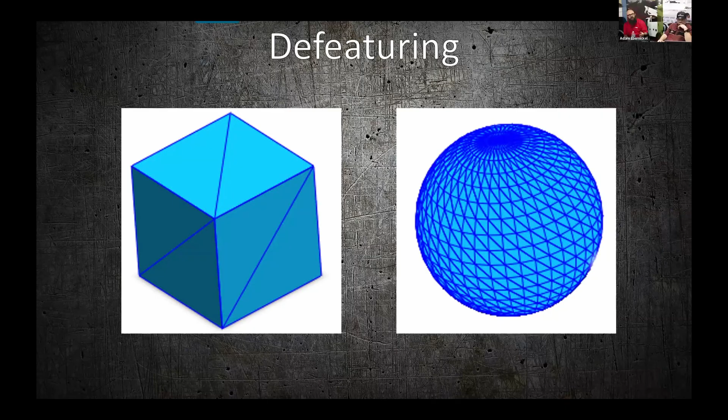So, like tanks, we see a lot of these.

First one, multi-body part. It's got a lot of stuff in it, a lot of information. It's not an assembly, downloaded from our manufacturer, and it's got all these individual parts in it, but it's all just one big blob essentially, with all these faces and whatnot on it: 18 million graphics triangles on one part that the customer is never going to see.

I don't want anybody to do this on their designs. But you see, right behind that centered bar, this baffle in the middle, you can't even see the detail because it's triangles broken up in the file.

18 million graphic triangles just on this one graphics card that we did the study on was 1/10 of the actual capacity of the graphics card, just on this one part.

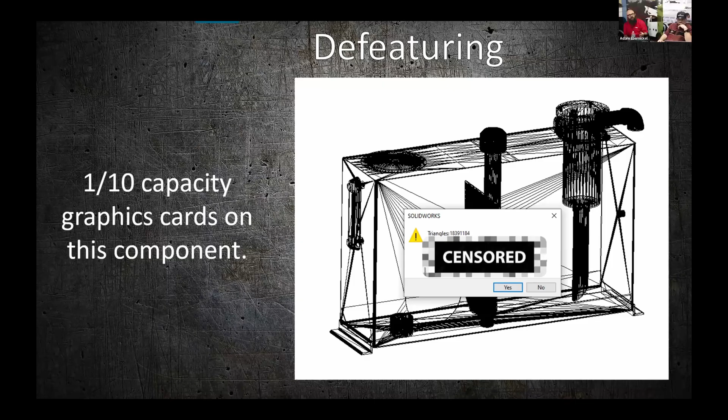So again, you have a finite resource built into your machine. We spec them out fairly well, but we're using 10% of the graphics card just on one part inside of your sales model. It's going to drag you down.

That internal baffle was just holes. The correct thing to model, if you're making that part, yes, that's correct, we did have all those details. But if it's going to be inside of that tank, in a tank install, which is going to be on a sales model, our customer doesn't need to see that internal structure. Neither does SOLIDWORKS. All we're doing is bogging ourselves down with our own modeling practices.

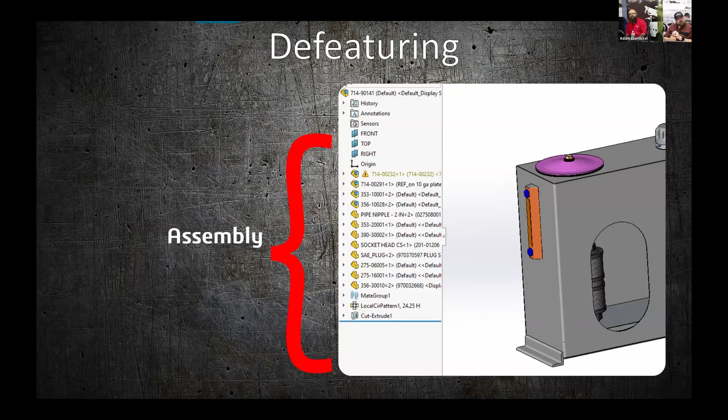So we had a user go through, disregard the error up top, and actually turn this thing into an assembly with individual parts in it that we can suppress and unsuppress and modify a little bit easier, rather than just having a multi-body part.

And we got it down to 136,000 graphics triangles. So from 18 million to 136,000. I didn't do the math there, but that's like a 90 percent or more reduction in graphics triangles.

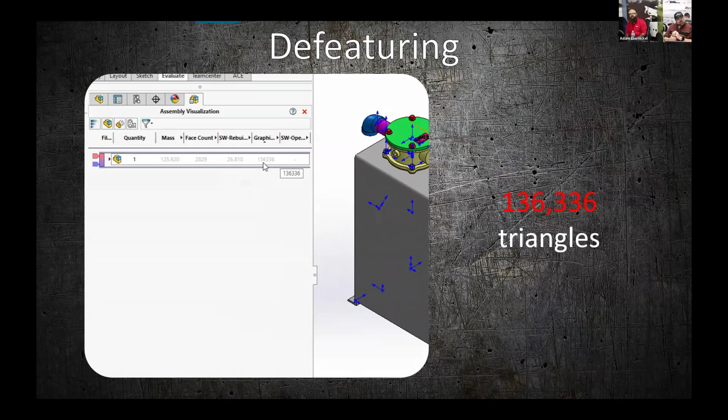Just that baffle went from 12 million graphics triangles to 20. Just the bare minimum, because we're not going to be making this part at all. It doesn't matter to us what the part looks like internally to our sales model or internally to our install kit, because that baffle is welded into a part that we're not going to actually touch and physically make. Somebody else is going to. So we defeatured the crap out of it. We took everything we didn't need out of it and just made it into basically a square. And we went down to 20 graphics triangles.

Massive improvements in calculation time and speed, just on thinking outside the box on, do I really need that? Because as designers, the first thing I want to do is design a really nice looking part because I think I can do that. I want to design all my screws, nuts, bolts. I want to have all the features in it because I'm being paid to model and I'm going to model the thing correctly. Do we need it? No, we don't.

So here's a prime example: truck latch. There's roughly 12 door latches on a truck body. Adam's very familiar with this model, I'm sure. A previous model with the logo and with all the information in there, you see all that data. There's actually text embossed into the handle. There's text embossed into the top of the plate. 209,000 graphics triangles in one latch.

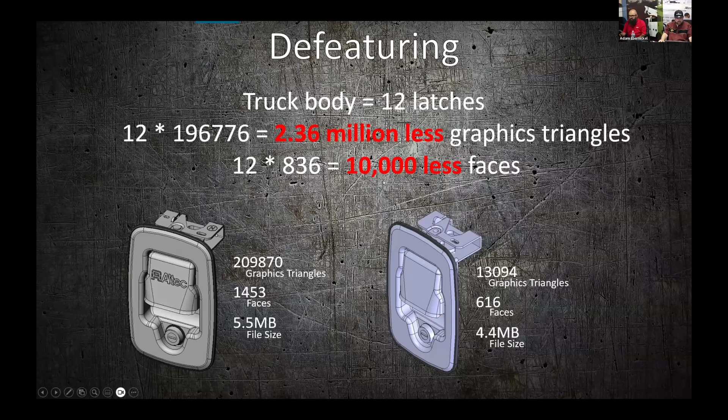Placards. Who models placards in SOLIDWORKS? Okay, do you extrude the text? Don't.

Read the text on that one, on the left one. This placard has 25,556 graphics triangles. If you just leave it as a sketch, which will show up in your print, it goes down to 172 graphics triangles. Yes. We also, inside of Altec, have, if you go in and use your start part for a placard, a simplified sub-configuration in there where you can suppress all that and just have a plain flat one. So when you drop a model in with all that extra text, you're adding orders of magnitude more graphics calculations for your models.

Yes, if you have a sketch in there, you can have it. Yep.

So just be mindful. One of our CAD admins did an event, I don't know, 5 or 6 years ago at World called 'Prove It, You're the Cause of Your Own Problem.' And this is where we kind of got to the point of we were causing our own problems because we were over, I guess, doing our jobs too well and making everything really nice and detailed and pretty. But when it comes down to sales models, these final assemblies, you're working on these big sales models, kicking ourselves in the butt here, trying to

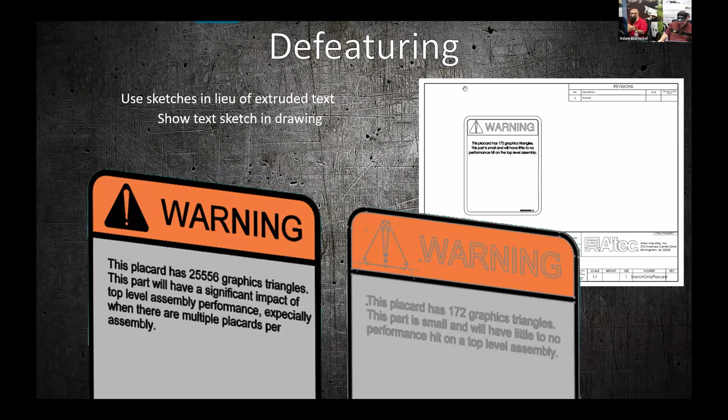Just little things we need to think about as we're modeling through our day-to-day jobs. Deepak says he's using sketch text a lot these days, and it's helping keep the graphics limited. Yes, sketch text does a pretty good job.

So how do we defeature a part? Somebody else mentioned that defeaturing is also critical for creating efficient FEA models. Yes, it is efficient for FEA models as well. Y'all don't do much FEA here, do you? Once in a great while. Good tips, I like that.

So we're going to take this really sweet looking air filter from a company everybody should know, K&N. Because I'm a motorcycle fanatic, we went and actually downloaded a K&N model. We're going to defeature it, and we're going to do it two different ways: the slow and steady way, showing how to do it manually, and then we're going to do it automatically using the features built into the software.

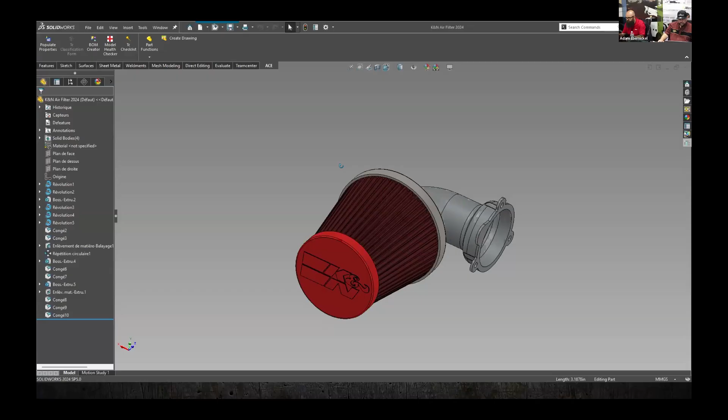So I downloaded this one from a French company. As you can see, all these things have French words in them, just so I don't have to speak French. Oh no, I don't want to see that, go away, trying to get to my options here.

Hate the screen share thing. Alright, tools, options.

It doesn't automatically translate, but you can tell it to. Go to the feature manager system and it shows translated features. You tell it which one you want to go to. This is if you use suppliers that do everything else. Then in the feature tree, it'll translate all the features. That was one thing Adam taught me last year that I was blown away by.

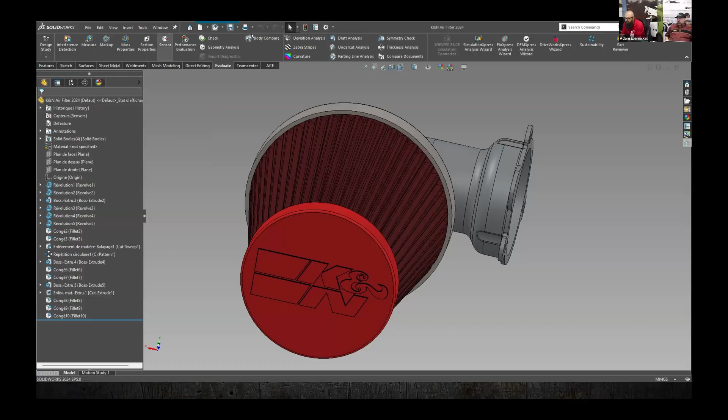How many surface triangles are there? Let's go to evaluate. Hopefully everybody can count past their fingers and toes. What are you talking about? Go away, I love it.

Teams is really bad. So graphics triangle count is 42,074 currently, according to this model. And the circular pattern, pardon my French, takes up 91% of my calculation for this part. Wow, one circular pattern.

Don't ruin my story, sorry. Okay. Move this up out of the way again. I hate Zoom control sometimes, especially since I don't use it much. It's better than Teams though.

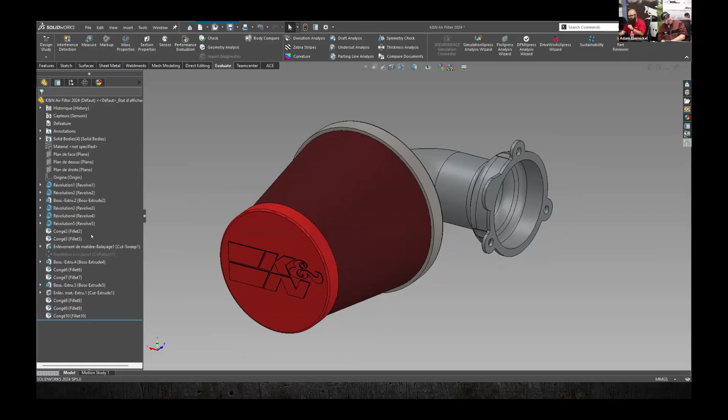So we know that's our problem. We can do something for manually simplifying a part, something as simple as just suppressing it and taking out the cut that caused it.

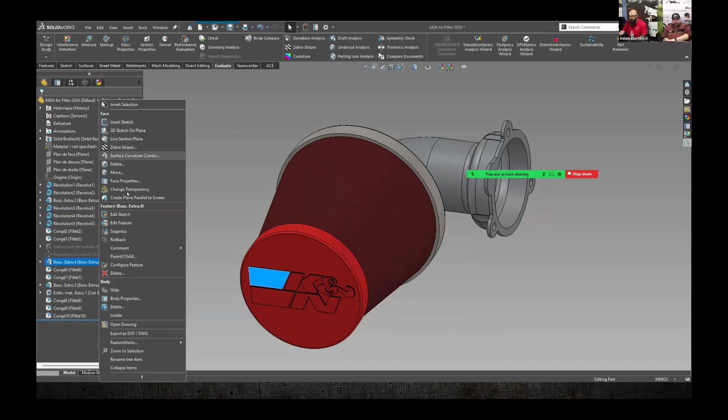Let's run our performance evaluation again. We have 10,000 graphics triangles just on those two features. Now, do I need to see the K&N logo if it's going to be on a full assembly, full chopper assembly? If I'm going to render it, maybe I can turn that off. Do it again, run a performance evaluation. We got it down to 14,000. So we cut down the graphics triangles almost a quarter with three features suppressed.

Is there any other feature, kind of like how in an assembly there's lightweight for parts? Is there anything like that for individual features? You can do that with some patterns. You can tell it to use a geometry pattern versus an actual pattern. An actual pattern takes the physics and cuts the part over and over again. A geometry pattern just moves one blob of information around.

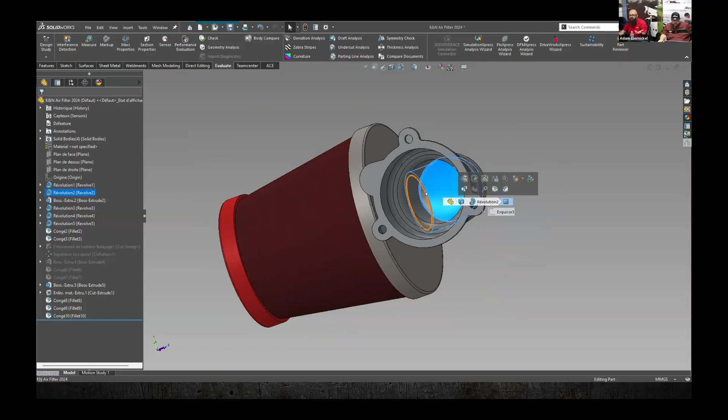But we've got a fairly decent looking model in here. Do I need to see all this information in here? Maybe not, I have to go in and fill this in. We can come in here.

Come in here and do a sketch. This circular sketch here, we'll convert to entities.

We'll convert entities using our shortcut bar. Use the S key or your mouse gestures into your shortcut bar, because I don't like touching the keyboard at all. Let me move my 3D mouse over here.

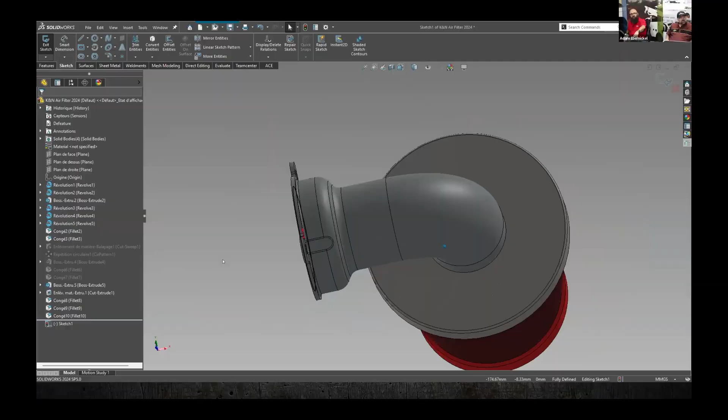It's choppy on mine because we're streaming across two different devices here. Look at his, it's a complete smooth rotation on his. It actually makes SolidWorks function faster, because when you use your mouse wheel to navigate, every click and scroll regenerates the graphics. It won't regenerate the graphics until I take my hand off.

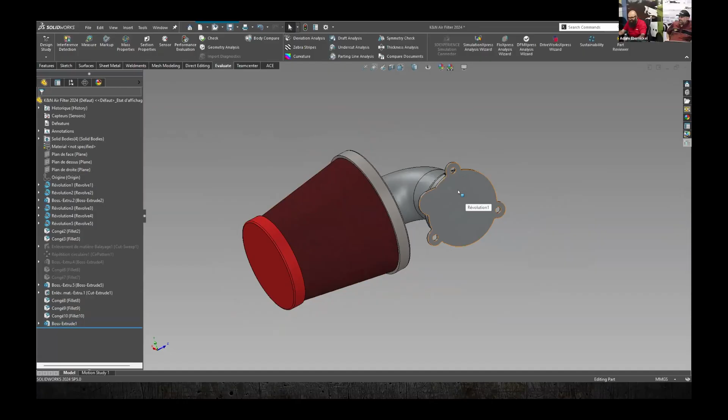But see, I filled the end up here just with an extrude because I don't need to see the internal faces in there. We'll do our performance evaluation again. We're still around 14,000 graphics triangles. Eventually we're going to reach the point of diminishing returns.

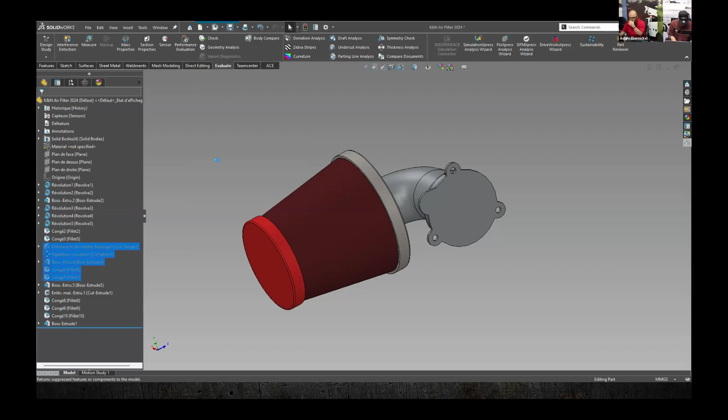So we defeatured this part. You saw how slow that was, but we're going to unsuppress all this stuff here. I wouldn't say it was slow, but it wasn't as efficient as I want it to be, because I'm being told I need to get this thing out. My supervisor yelled at me, my part's not done, I got to get it done fast.

Well, SolidWorks has a nice thing called the defeature command. If you don't have it up in your command manager, go into your search bar, using your S key again to get your search command. Spell out defeature, and we've got the defeature command here.

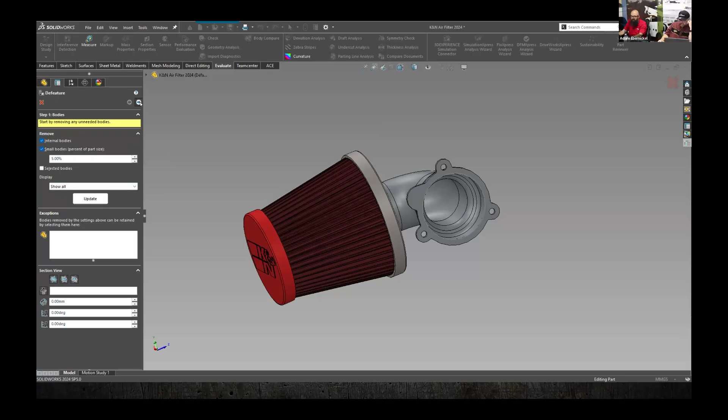So we're going to start. We want to remove all internal bodies, and any small bodies less than, let's say, 5% of the entire part size. I want to then click the next button, the little arrow key at the top here. It's going to split the screen and allow you to say what features I want to keep. Of course it's not going to do it the way I want because of how I'm using this.

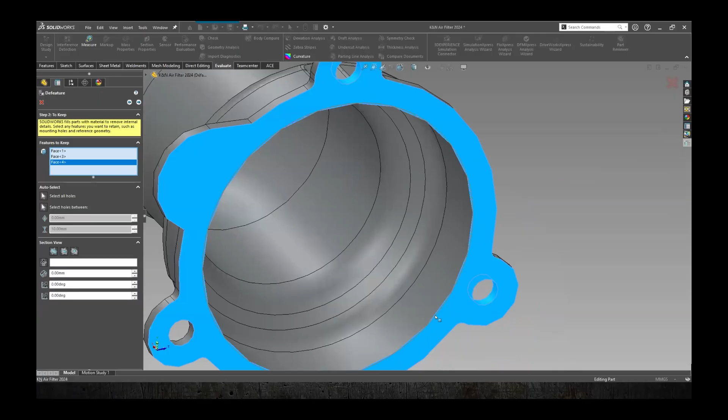Let's do this, go back. Okay, so I know I need to keep the mounting face, and I want to keep the 3 bolt holes that I want to keep.

To remove internal details, it's going to sit and actually defeature over top of everything, start taking away features. So we can come in here and say, okay, now I've got some things I want to remove out of the feature tree. I can come in the patterns I want to get rid of, select those, find it, there it is, and click the next button.

And it's going to sit there and defeature everything internally, removing the parts you don't want. Then it's going to give you an option at the end to save it as a file itself, like an external document, or you can save it as a new configuration. At Altec we want to use an internal configuration so we can use it later inside of a part.

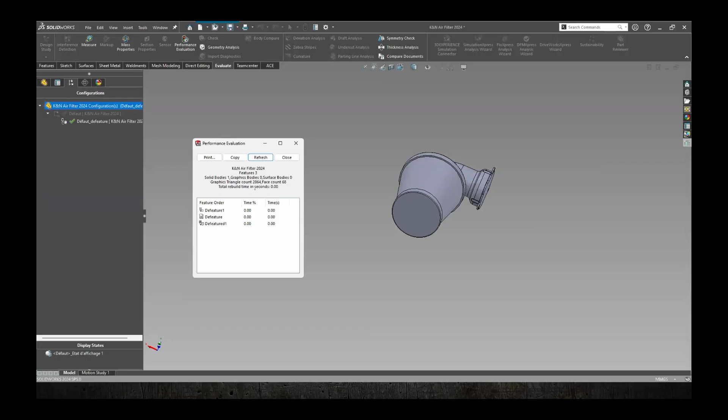And so obviously, if you want to change the way this was named here, let's see.

There's a way we can change how this was named here, or have Teamcenter recognize it. I'm not sure how Teamcenter will play nice with using the actual name of the defeature tool, but I believe we can. Can you rename it like ref underscore something? I'm going to look at that real quick.

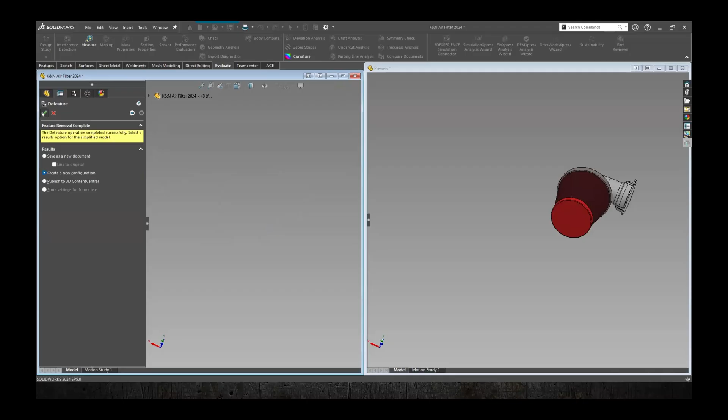But if you're not using a PLM, you can just go as is and run it. I would love to have called it simplified. As long as you're not saving it, you should be able to drop in and change it. If you can, you can probably get that added to the list of accepted names.

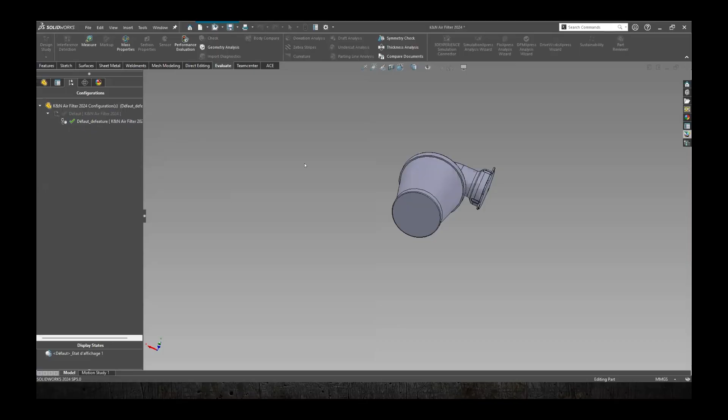Underscore defeature, it is a sub configuration. It's actually trying to pull that configuration. Inside of Teamcenter, we'll have to add that, I think, as one of the swim commands for the defeature, or I know we have one called simplify. You can do the same thing manually, call it simplify, and it'll allow you to save it as the regular part, what they call a non Teamcenter managed part.

So just to give you an idea of why we want to do this: we're limited on our resources and what we need to do. And obviously this thing spins a lot faster and rotates a lot better. If we were to do a slice on this thing, it is just a big solid blob, because I don't need to see everything inside.

One thing you want to be cognizant of is the weight, right? You want to still keep your visual weight. No, this will not take that into account. So if you were to go into mass properties, you might have to tell it what the weight is. If the supplier gives you an accurate weight, you can add it in here as your override mass properties, because a lot of our valves come in just as surfaces and we have to put them in anyway. So defeaturing it doesn't really affect it when we already manually added our center of gravity.

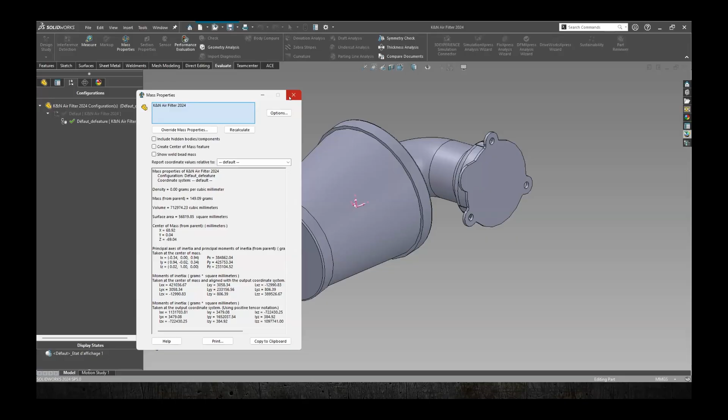I'm just going to say that was all one material, right? Yes, and it's got a weight to it, and now you turn it into a big block. Yeah, it'll add some weight unless you go in and fix it. So that's one thing to be a little bit cognizant of.

Water cooler weight, like it. Was the water cooler? Yeah. Oh yeah, the water, 1,000-pound water. That'd be funny. Well, I mean, a water cask with water in it is pretty heavy though. If you think about it, 5 gallons of water is like 40 pounds. That's pretty heavy. But if you left it as a default material, oh my lord, you would treat it as a big chunk of steel. Yeah, a couple hundred pounds. Or your weight study up there.

So, at the end of my presentations, we always like to call people to try new things. So try to defeature some parts. If you get something from a vendor, defeature them manually, or we actually have a submitted ACE idea where you can submit it in. We have a gentleman out in Midwest that will defeature and convert parts for you.

If you run into a situation where it's a valve that's overly complicated, or you get a step valve that's blown up, reach out to him or to me or Adam. We can always work on that. I like helping people out on these weird edge cases. It's so much fun to try to figure out, okay, why is my part blowing up? Oh, you forgot to add a comment there or something, and it makes it funny. But teach your coworkers, you got a lot of y'all here. Spread the word around. Stop putting text in your placards.

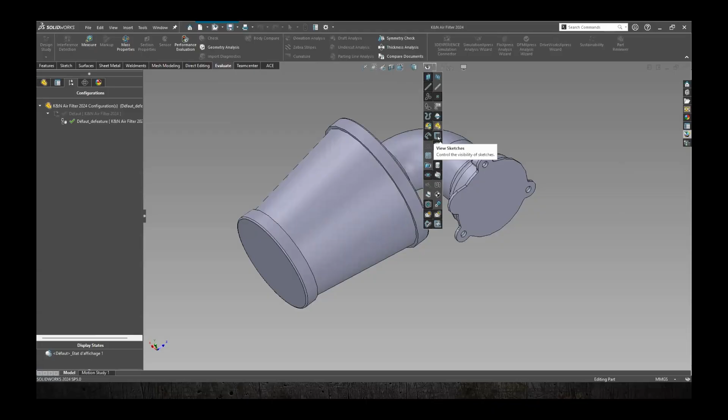That's it, no sketch or right like that, or poke the eyeball. And in the drawing, so you can come in, inside here you hit the eyeball button, you can say I want to view sketches. And then inside that individual part, you just make sure, let's go back over here to this one.

You want to go back in to find whatever sketch you want to find. You could say I want to show that sketch, it'll show it. And you have to show it in the print too, yeah, you have to tell it to show it in the print. But it'll allow you to not have to have that extrude cut in there.

Because there's really no reason for it, right? Yeah, as expected, there's not. It looks pretty, it looks really pretty, especially in the model. I guess the text is a little harder to see in the model than on the print, but who's zooming into the model to read the text? I mean, you made it, you had it put on there, right? Now you know it's good.

So all you really need is that part thrown into that model to drive it appropriately on the building material, it just needs to be placed. You can put your edge dimensions in there where it needs to be, but none of the information on the placard has to be there. Right, at the part level we can do that, yes, still at the part level, you would do it on the actual placard part itself.

Okay, suppress those things. A lot of our, I'll just show you here. You go to a new part, up at the top here we have a placard start part. It even comes with a simplified configuration, and it will open that up here, and it has a simplified configuration in it which will suppress all that information.

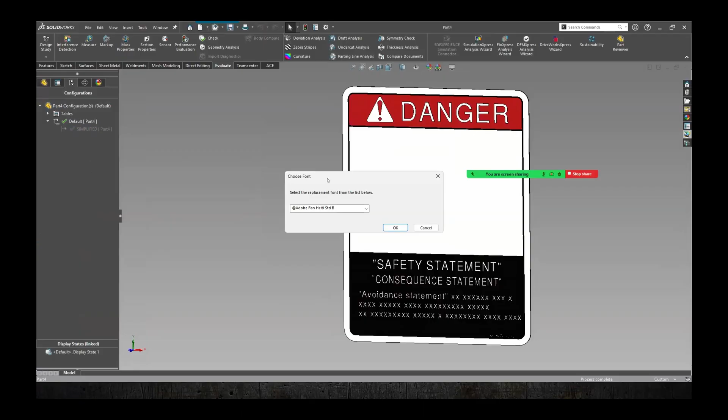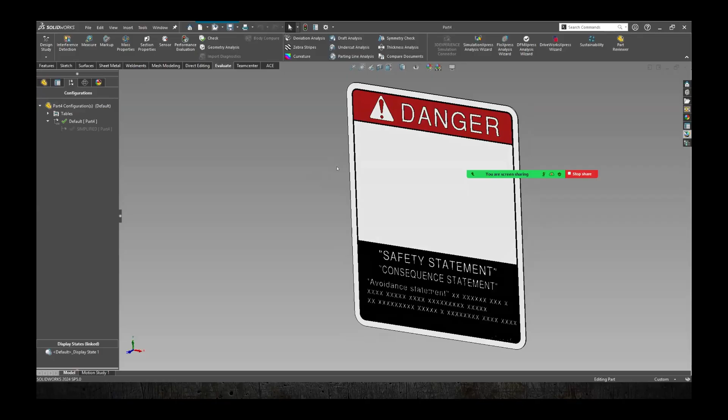Has anybody tried the KB Max tool we have for placards too? I didn't know there was. Yeah, do you have a KB Max representative here? Get with Rona, check with Thomas Lusk. He's not online, but he did a lot with it, so he'd be able to point you in the right direction. I don't handle placards, but I know it's there, I use KB Max quite a bit, and there is a KB Max placard in there as well.

Okay, but for people who don't have the KB Max option, because you have to pay for licensing and things like that, we have a start part for a lot of different placards, and the simplified version is just a square.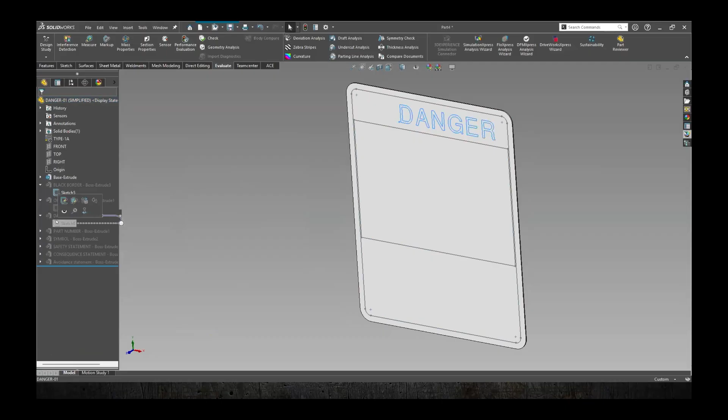So just to show you, this one is 15,000 graphics triangles. The simplified one is 112. On that simplified one, you can show sketches and it'll look like the placards without the colors. Was the thing is, I use placards that are used by clients too. If I go in there and delete the boss extrude, do they have to show sketches? No, it's in the file, at the part level itself. So if they pulled it up again, they would see that text.

If it's somebody else's file, another division, that would be a minor rev. It would be minor rev model maintenance. And if you're porting in a placard from another org, you can ask whoever it is to defeature it down. They're ultimately responsible for the use of that. Just give them an explanation of why, like 'hey, this is killing my part file, please fix it.' And then guess what, you just dropped some knowledge on somebody else that needed it.

Do y'all have any more questions? Let me see if anybody has anything online. Do we have any questions? Pablo had a question. Okay, you want to ask, Paul? I'll look through Zoom.

It would be a good idea to override mass, center of mass, and moment of inertia to preserve that data, if needed. So there's a suggestion, not only the mass, but center of mass, moment of inertia, and those things too. You would have to do that to make sure it works as intended, or has the same information there, yes.

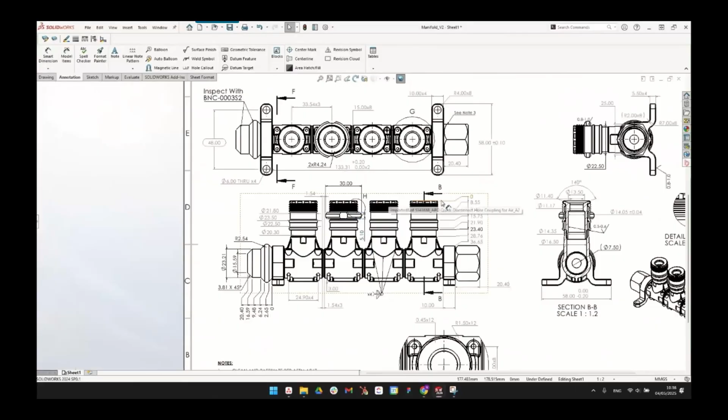Let's say you've made a change, maybe to the model, the drawing, or both. You check it into your PDM system and create a new version. That's when the magic begins. Right after check-in, Bananaz automatically compares the new version with the old one. You'll get a notification letting you know your compare is ready. Just one click and you're in. Need to come back to it later? No problem, all your compares live in your personalized dashboard alongside tasks, design files in workflow, and more.

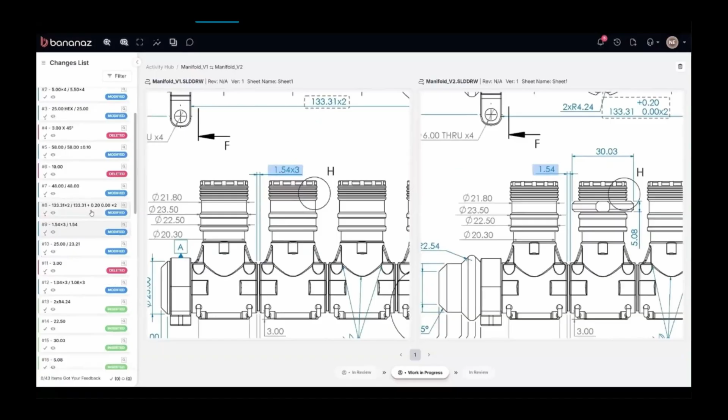Inside the comparison view, you'll find smart insights: overwritten dimensions, missed details, items that don't comply with your standards, even suggestions to improve your design. It's like having a second set of very sharp eyes. Want feedback? Easy, share the comparison with teammates, leave comments, request changes, and track every note. It's built for collaboration, and yes, there's a full audit trail. Also see every change highlighted and categorized: what was added, deleted, or modified. Small stuff like view shifts, non-form, fit, function edits, we don't clutter your view with those.

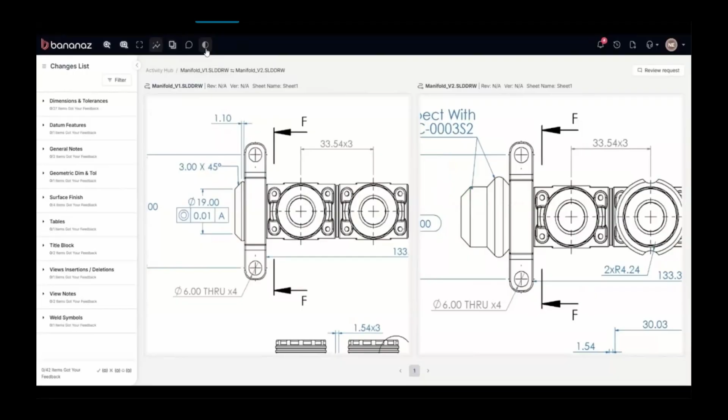And what if a change was unannotated? No problem, our 2D overlay shows added lines in green, removed ones in red, right on the drawing itself. Simple, visual, and easy to understand. Ever struggled to track BOM changes after renumbering? Not anymore.

We align text to updated numbers, making BOM comparisons clear and easy to follow. And for 3D models, just hit Compare.

Get a side-by-side view with all volume changes clearly marked. You can comment and annotate right on the model, and your notes stay in place even when you move the model around. While reviewing, you can instantly see who approved what and add your own approval in one click.

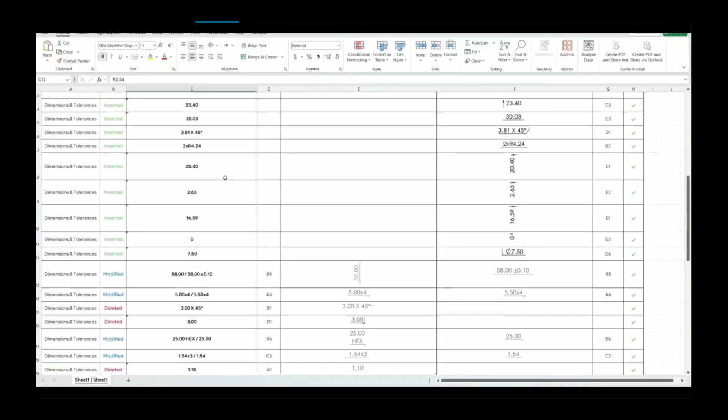Want to share? Export the changes as red line drawings for both versions. You'll also get a detailed report that clearly shows what changed, perfect for handing off to a colleague or supplier without endless explanations.

And here's a feature that surprises a lot of people. Bananaz can even write directly into your CAD software, automatically placing revision symbols on drawings or generating change descriptions ready to copy and paste. Because nobody wants to send a drawing back for a missing triangle, and nobody wants to fix it either. That's just a sneak peek of what Bananaz can do.

Okay, see if that speeds up everything. You're trying to stream to two different sources, two different sources on a cell phone, guys. It's so good.

So moving on to the next presentation, what I've got here is going to be, did you miss it? What's new, tips and tricks that you might have missed over the years. My first question I'd like to start out with is, does anybody know what is special about SolidWorks this year?

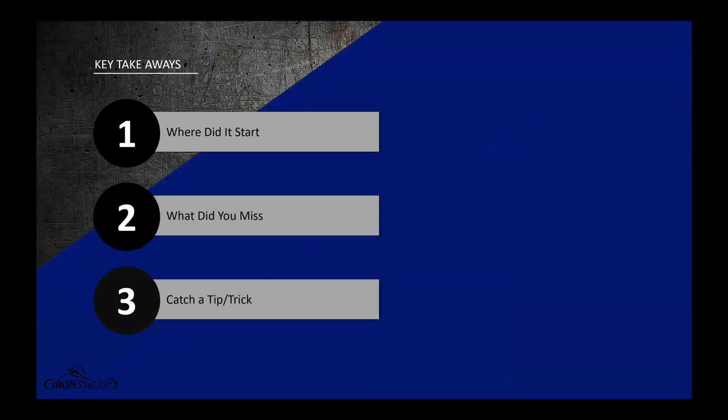So let's first look at this. I'm not going to play the full video - this was done by Dassault Systèmes, it's on their YouTube channel, if you want to go look at it you can. But I'm going to play just a few seconds of this just to look at some of the then and nows and the progression that SolidWorks has made. It's going to play, I promise. There we go.

So any of the old heads might remember this, but this is how you had to set up relationships before. If you wanted to set something coincident or horizontal or whatever, you had a little dialog box that popped up, and then you would set that coincident or whatever. Kind of reminds me a little bit of a software that shall not be named. So it's a little bit older, dated back. Now you can see you can create relationships a little bit more on the fly. You still have a properties menu, but that's usually docked over on the side, right?

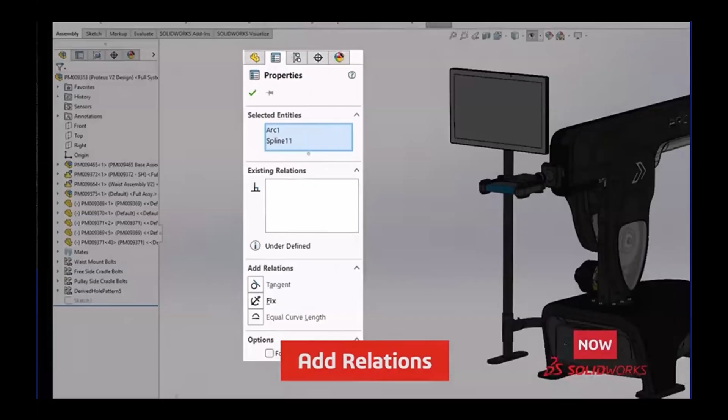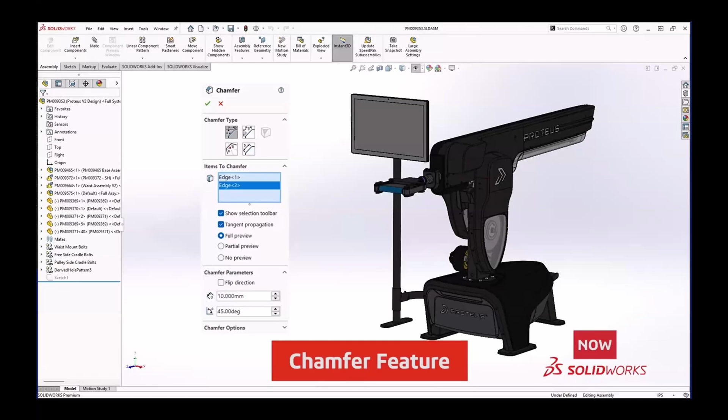Here's some chamfer stuff - this is how fun it was to do chamfers at the original date, right? Versus now, a little bit more streamlined, a lot more user-friendly. They took a lot of our suggestions as a community back into heart and looked at that. And of course, just doing some dimension properties here. So much better, so much better. We're not going to spend too much time there - this was just to give you an idea of some of those things that happened then and now.

Let's see what the next one is real quick. So this is just opening, just a simple open. Anybody remember when Windows looked like that? To now we have a better open - we got faster opening stuff, recent opens and stuff like that.

All right, so let's just jump back and look at some history with SolidWorks and kind of where it started and came from. So it started in 1995, that was its release. So that's 30 years ago this year. But I want to back up just a little bit, because that was just its actual release - it wasn't when it really kind of started, in my opinion. I feel like it kind of started back in '93, which was the conception of it.

Does anybody know who Jon Hirschtick is? He's the guy who developed SolidWorks - he was the brains behind it. Anybody ever watched the movie 21? It's a blackjack movie about a bunch of MIT students who went and did some card counting. Jon Hirschtick was one of those MIT students that they made that movie off of - he was one of the card counters. It was actually a card counting club that MIT had, called the MIT Blackjack Team. He was one of those students, and he took $1 million of his winnings and said, I want a CAD software that is not only more user-friendly, but is not on Unix like everything else was at the time. I want it on Windows, and I want it to be affordable - I want people to actually be able to afford this software and use it.

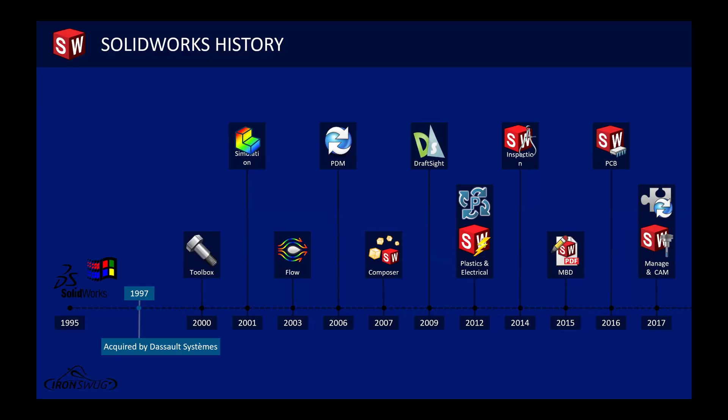So jumping forward, let's get those out of the way and let's go into a little bit more stuff here, and just look at all this. This isn't even all of them, right? This is just the tip of the iceberg - these are the ones that I felt were probably most beneficial to me and people I knew, because there's even more than just this. And we're going to dive into some more of them here in just a second.

But yeah, you got all kinds of crazy things - things like display states. Who would have thought that wasn't there, right? Could you imagine running your system without display states? That'd be kind of hard or aggravating to put together certain drawings and stuff. Lightweight - having a lightweight model, not having to worry about loading everything in and taking the hit for opening times. You can load them in lightweight, LDR was one of those things that came out. Mates, grouping mates, isolating, shortcut bar, mouse gestures - all these things were iterations that came out along the way that I don't know personally if I could live without right now.

So let's look and dive into some of these a little bit more. We'll talk about them, and hopefully we can come out with some things here. Let's look at the first one, in-context modeling. Does anybody do any in-context modeling?

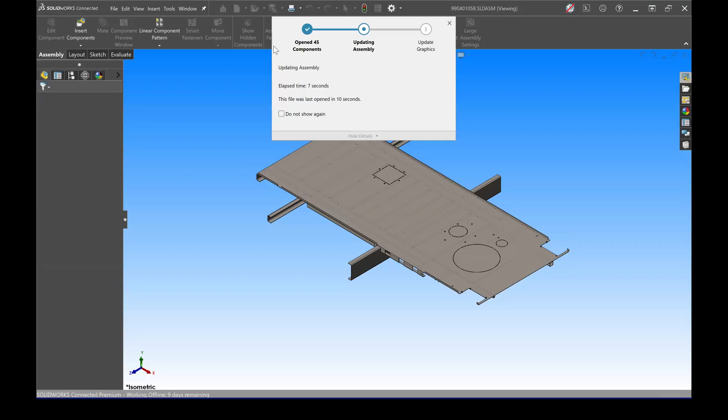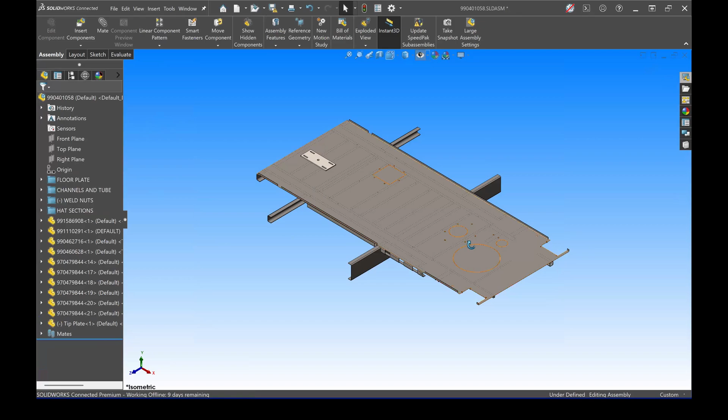I'm going to jump in and grab a plate real quick. Now, I'm just going to set that there. I'm not going to fully mate it or anything, just get it flushed, that way it's sitting on the plate.

But let's say I had this floor plate, right? And I wanted to modify it or edit it. I could edit it there, right? And then when I want to create the sketch or the cutout, I could simply do that with the command.

I use my mouse gesture, I'm going to go ahead and do a cutout. And as I apply the cutout, I can do things like clicking this edge here, and then this convert entities, which also lives up here in your command manager. Do that. Okay, and now it's there, right?

So there's sometimes that I will have to find it here, and there's sometimes I won't. It depends on how complex this model is before I decide to define, because sometimes it won't want to grab sketches - it'll try and grab parts, and it doesn't want to grab the parts and stuff like that, right?

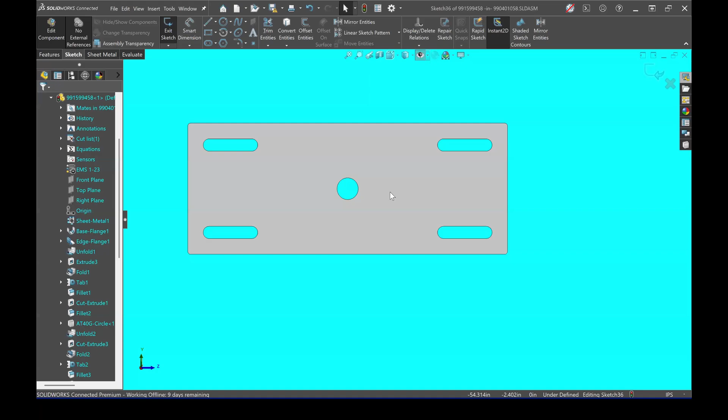So there's times where I'll do whatever I need to do with that convert entities, get what I need out of it, and I'll go ahead and close - no, sorry, wrong one, cancel. Go there. So, okay. And it's because I didn't fully close out of it the first time, I hit discard. It's not there - the sketch should still be here though.

So I'm going to say, we'll take that and add that cutout back. Say that's what we want. And then we can come back in and edit that and fully define it on that part. So I know it's just converted, I can convert whatever lines or entities I want over into that next model and help get mounting patterns right. I don't have to sit there and take measurements over and over and find out what the hole spacing is or how big the hole is. I can just convert the entities, apply those straight to the other part.

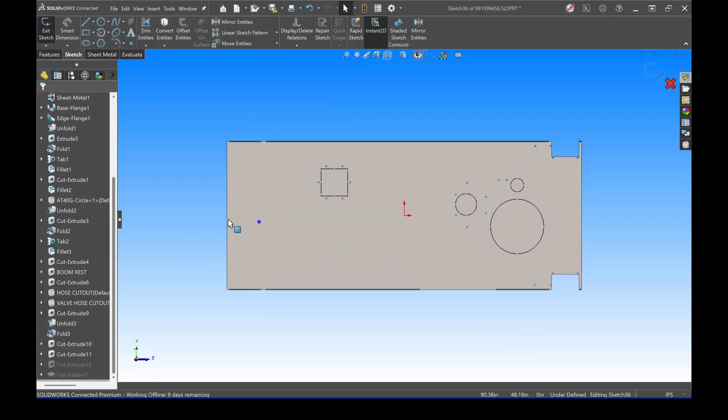Now, of course, doing it this way and having your external references on and off is another thing. If we jump back into the part, just for everybody's context to be able to see what we're talking about there - if we come back and edit part in place, this is your external references up here in the top left-hand corner. For associates at Altec, we try and keep that off so you don't create external references.

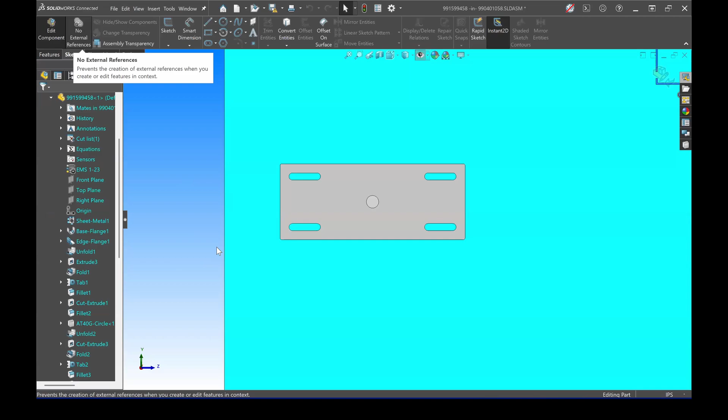For others out there in Zoom land, it's totally up to you and your company what you guys want to do. Okay. But you could still do what you did, but before you get out of the sketch, you just break that relationship - yeah, you can still do it. Even if that's on, yeah, you can break the relationship too. Yeah.

Just always make sure you go back and define it. I've seen some people, and I don't think they're trying to do anything wrong, it's just they do this and then they forget to go back and define it. And then you've got undefined sketches and features and stuff in your tree. And we definitely don't want any of that.

All right, so for the next one we'll look at the CSWP. Anybody in here got a certification? Good. Not this one? Soon, right?

The first CSWP certification was actually rolled out in 98. This is a shout out for the certification team - they've always been supporting us out here on IronSWUG, and Daniel Bernilio, he does a great job, helped us out with a lot of codes yesterday. So we want to shout out certification, get those certifications, give yourself a pat on the back, but also prove what you know. I feel like certifications will only help you benefit and put more arrows in your quiver.

Of course, you may only do sheet metal, maybe you don't see sheet metal on most of the certification testing, but what it does is it helps you figure out how to solve problems. I think it has really built your problem solving skill on top of the specific data they're wanting you to learn as well. So it's a great thing, good job getting your certification and continue doing that.

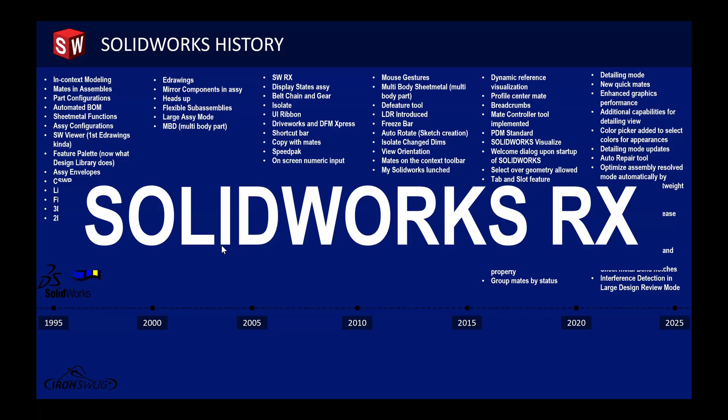Now I am using SolidWorks Connected, so it's in a little bit different location, and I'll illustrate that here in just a second and show some different functionalities within SolidWorks RX. It'd be really great for you to use. If you are on a regular SolidWorks installed license, then it's going to live here in your task pane. It's also up here, but this is actually where it only lives in SolidWorks Connected. We'll hit that drop down, go into SolidWorks RX.

And we can see different things here. This is kind of our home tab. It's basically just showing us some different things, we can go to these different tabs, see stuff from.

If we jump into diagnostics, I don't know if I'll leave it here too long because it may take a little bit. This is going to be exactly what we heard here, maybe use it for graphics drivers. It's basically checking your hardware's system information and making sure you are compliant with what SolidWorks says your system needs to be.

I use it to see how long it's been since somebody restarted the machine, because I ask them, having problems? When was the last time you restarted your machine? 2 days ago, and I pull up the thing. Now it says 31 days since you restarted.

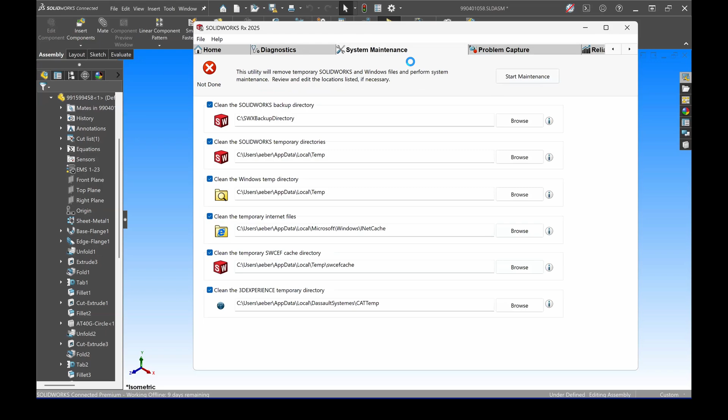Actually, let me jump back to diagnostics one thing, just especially for this one comment I want to make. Oh, mandatory reboot every 7 days.

Oh, that's awesome, whether you like it or not. That's pretty cool. Every weekend it has to reboot. Oh, I like this, that's not a bad idea. Say you gotta do it anyway, they do their software update. Yeah, it's inevitable. Maybe that's Altec's passive aggressive way to get you to restart your computer anyway.

We got a system update, you're gonna have to restart anyway, right?

So here it is, it finally did load. You can kind of look down through here, see I've got check marks, I've got some different things that have some information. So last reboot was an hour ago. Some newer versions of stuff in here that's just giving me information about, right? So it's really good stuff. If I do something change, I can reload the results.

But the part I wanted to talk about in here is that graphics driver that somebody just brought up, because especially on our devices here at Altec, Dell Command Manager loves to update your graphics driver. And also, when we push updates, sometimes that happens too on those Thursday updates. There's a way to go in the background in Command Manager to flag it not to update your graphics card, we just haven't got that far yet.

So keep in mind, look for ways to do that, because when it updates your graphics card, it's just pushing you to the latest, greatest graphics driver that card says you need. Now, did Dassault Systèmes go and investigate that driver and make sure that it works perfectly with the program? They didn't have time to. They have to have their team go in and look at it and make sure whatever changes needed to tweak were fixed with it, right?

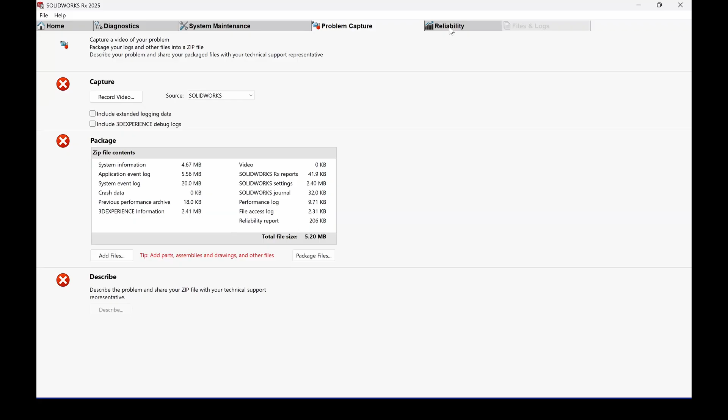If you are having those crashes all week long and we can't identify what it is, and you're up against the fence, you can go here and say, boss, my computer crashed 100 times this week, and then get this data right here, and it will actually delineate all the crashes, when they happen, and everything throughout the week. It'll show you all the different information about it.

So if I hover over this guy right here, or click on it, usually it'll tell me what it is, or I can come down and list and look too. There it is. Okay, so yeah, ended by task manager or other events, right? So it'll actually tell you what you've done.

This is just a normal close, and then you'll see some in there where they crashed and stuff like that. And it gives you all the kind of data about that to give evidence that it's crashed 100 times this week. And that's why you might be delayed till Monday for release instead of Friday.

I like how you look back. So use this SolidWorks RX tool. It's very useful and resourceful to help gather data and troubleshoot maybe something that's causing you issues.

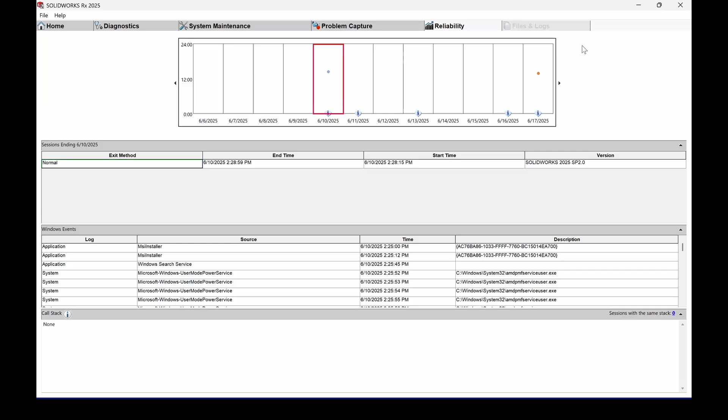I want to see that. Check mine.

All right, so the next one is going to be the shortcut bar. I'll ask plus one in the chat if you use the shortcut bar, and plus two in the chat if you promise to use the shortcut bar after we talk about it. Plus one, or not, to you guys. You can just hold a finger up, I guess, right? How many guys in here use the shortcut bar? How many guys in here, Eski? How many guys in here promised to try the shortcut bar after this meeting? Okay, got a couple.

So the shortcut bar is a phenomenal tool. It's one of those things that I harp on along with mouse miles. We'll get to that.

I think I may have touched on this last time. Does anybody remember what mouse miles are? It's the distance your mouse is traveling all over the screen trying to find the features and controls you want to initiate. So you're driving everywhere, and the more you drive, the more distance you build up, creating mouse miles that stack up.

It's like going to the store and rounding up. Some cards still do that - you set your card to round up when you buy something, and at the end of the year you've got a couple grand because you rounded up all year. That's the same with mouse miles - you're adding them up, you're going to keep accumulating them.

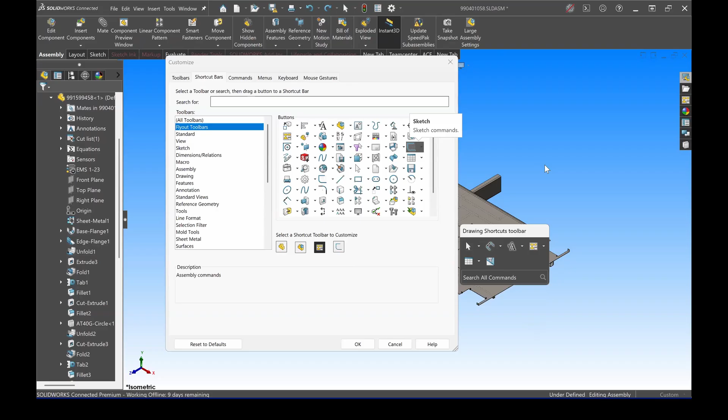So you can also use that shortcut bar with the S key - it comes right up at your mouse. A lot of people didn't realize this prior to 2023, since we're talking about dates and timeline here, that the command search, which is down here in your S key now, was not there. It was actually listed up at the top in your menu bar across the top, and you'd have to go up there and type it in.

A lot of people didn't realize when you hit the key, it defaulted your cursor to command search. A lot of people didn't know that. So SolidWorks in 23 said, hey, instead of that, just plug it into the S key - it'll be down there in that menu, they won't have to worry about if they see it or not, and they'll know it's there. But the reason I point that out is because it makes adding things to your shortcut menu so much easier.

And what do I mean by that? Well, if I come in here and I say I want to add, let's see, cut. Let's do an assembly cut.

So with the command search, just as a little bit of information so you can know what that does, because I don't have a point for it - you can click it and initiate the command. There's an eyeball off to the right. If we poke that eyeball, it'll drive us to wherever that command is and put an arrow saying this is where it's at. So that way you know where it lives.

And then the third option you can do with command search is to drag that straight to your shortcut bar. Boom. There it is.

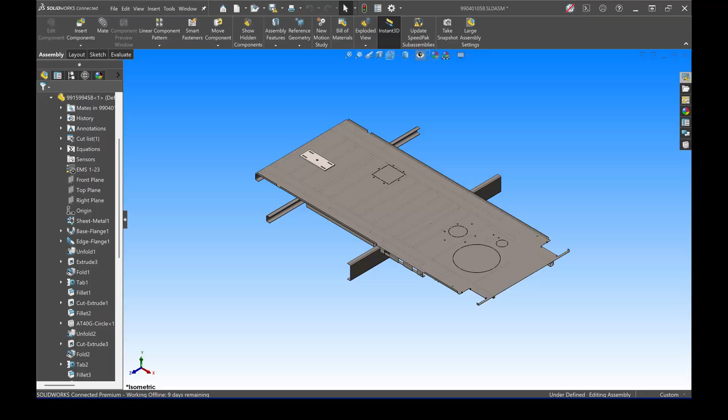So, all right, copy with mates. Who uses copy with mates? Plus one for copy with mates in the Zoom chat. Okay, we got a few here. Who does not know? Plus zero if you do not know what copy with mates is in Zoom. And does anybody in here not know what copy with mates is? Okay, awesome, this is going to be awesome. I love this answer - copy with mates.

And you can do some of this still with SolidWorks too. I've done it with the weld nuts - I use mate references in there. Other software calls it other things. But with copy with mates, it's going to completely eliminate a lot of time for you, especially in the mating process.

So the first thing I'll do, a little side tidbit here, is I'm going to come up - well, I can't go there because my Zoom stuff's in the way. So I'm going to come over here to my selection tool and say select identical components. This is just an extra tip and trick for you.

And who has a bunch of weld nuts or hardware or various parts in your model that are littered around, and you're just trying to organize it into a folder or figure out where it's at, hunting them down in the feature tree? This select identical components is going to save you a ton of time, because once you select that and come in here and select this weld nut, all my weld nuts are selected no matter where they're at in the feature tree and all over the part.

So there's your tip, your extra little tip for the day. I'm going to hide those because I don't want them - I just want to bring one in that is mated right, because that first one looks like it's messed up somehow. You can find it - let's zoom to where that's at. Right there it is. So I'm going to right click this guy, copy with mates.

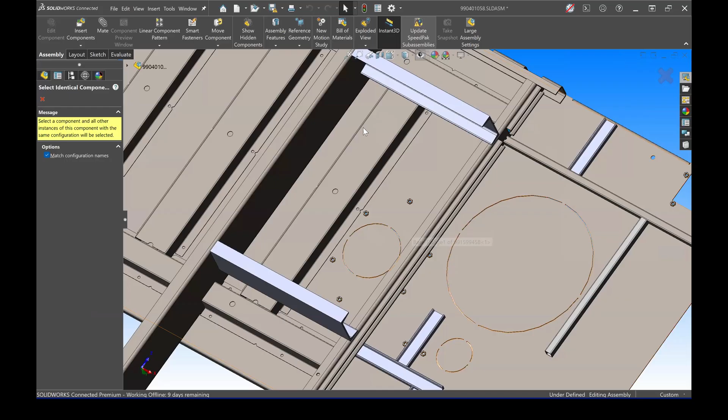I use this so much that it's actually sitting right here, copy with mates, right?

So it selects that part, and when you select next, that's the part I want to use. It's going to give you the different mates being used for it, and from here you can say what you want to repeat. I know that when I put that weld nut in all these different locations, it's going to be on that same surface, so I want to repeat that surface. The only thing I'm worried about is the concentric, but I've got lock rotation on it, so I don't have to worry about a planar mate or axes. I'll just leave lock rotation on.

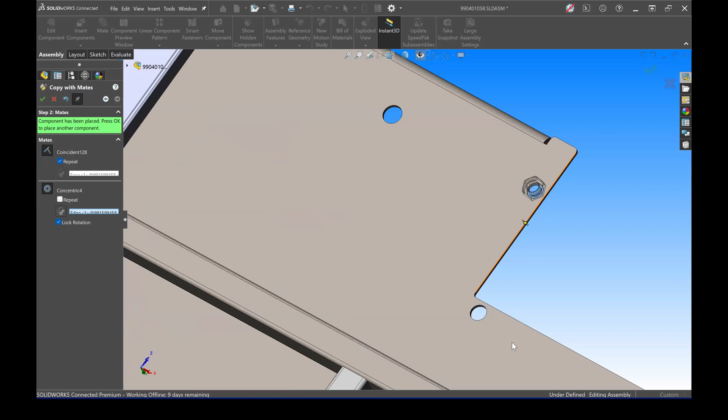I'll leave that open. Now what I want to do is anywhere I need a weld nut, I'm just going to click that edge, hit enter, click that edge, hit enter. Let's find another one we can put in. Here's two more - click that edge, hit enter, click that edge, hit enter. It's that easy, and they're all mated. I don't have to go back and hit mate, I don't have to do anything. I drag them in without selecting the surfaces and edges. That's just an awesome way of doing something with copy with mates.

Same assembly, yes, same assembly. So now here, I'll show you this - if it works on here.

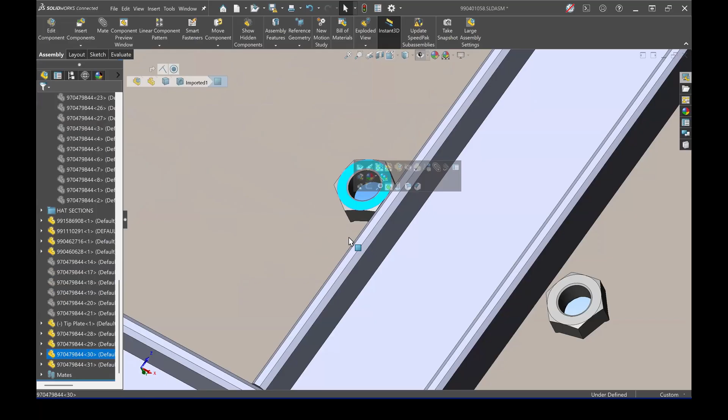This is something that I added, just a little extra thing you can look at, and I won't dive too deep for sake of time. I'll open this part up so I can drag it in. But I have some mate references here in this folder - I went in and added those a while back for our stuff. I'm going to show SmartMates just real quick here too, so I'm glad you brought that up.

When I come in here and grab that and grab the weld nut, watch what happens - when I come close to a hole, it just drops. So if you've got hardware that could use this functionality, reach out to a CAD admin and let them know, because now that I've added those mate references, they just drop and I just click, it's there. The only thing it didn't do - it basically gave me my coincident and my concentric mate - the only thing it didn't do is give me my lock rotation or planar mate to help get that third mate down. So that's that one.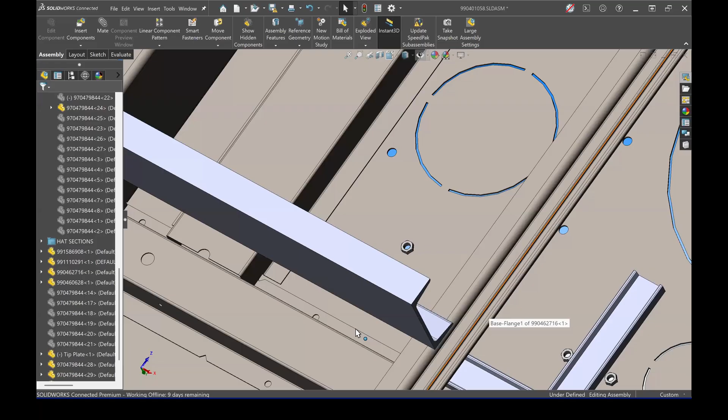And then back to your smart mates - this is something just kind of cool I'll throw out there. If we bring that same weld nut in, it creates... I mean, second bit, you don't care if it's not rotated, right? So I've heard different things. I've heard that if you don't have it fully defined, that's fine because it causes issues, or by not having it fully defined, you help this program not have to regenerate that third thing.

Having that third mate will lock it down and fully define it. I'm sure anybody here, the VARs, can validate this if they know. But the third mate does, in my understanding - what I've been told by Dassault - add a little more calculation to the process and rendering, and the calculation of it. The lock rotation is actually treated a little bit better in that calculation and doesn't slow down as much, so the lock rotation is good. However, there has been some issues with lock rotation on flexible assemblies and flexible mates, which you really shouldn't have when finishing a model anyway - it's really only for just kind of looking at things. But flexible mates can, I've heard and seen, cause issues with your lock rotation. You'll end up having your ketchup and mustard show up.

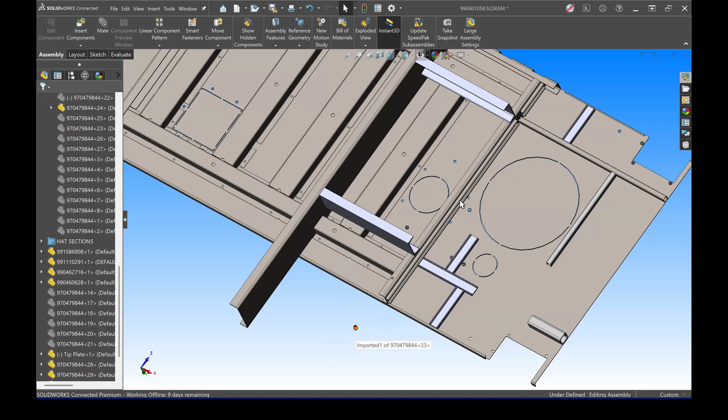Okay, so back to the smart mate, just real quick. I just want to throw this in while I was in here. I'm gonna drag this guy up here so it's where I want it. And then I'm just gonna grab this bottom edge because I don't really have a good edge to use on this. So I'm just gonna grab this guy right here and I'm gonna hold down Alt. Grab the edge - you have to grab an edge, that's a key thing about it. See how I grab that edge and hold Alt? It snaps right to it.

That's a smart mate. It applies when you do it. You have to grab the edge, but it's going to apply your coincident and your concentric automatically. Specifically edges, not faces - I'm pretty confident it's edges. I think I looked into that a while back, and the faces were not a thing. Does it give you a little pop-up and lock the rotation?

It does not. So basically what you would do then, if you're doing a bunch of these, I would suggest mate references, right? If you're just doing one-offs, then just go in there and click it and then go lock your rotation there. But either way, for example with mate references, when you drop say 50 weld nuts in there, because they're not pattern-seeded or anything, you drop say 50 weld nuts in there at once with the mate reference, then go to your feature tree or use select identical components, select all those, jump into your properties tab for your mates, and then you can go in and just select all your concentric mates, right click and lock them all at once.

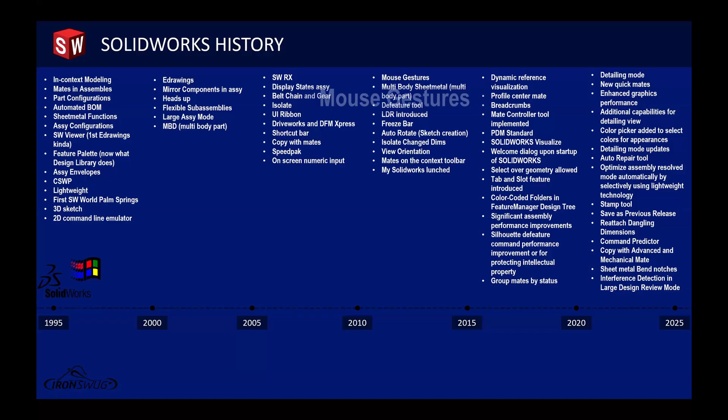Okay, mouse gestures - you mouse gestures. You already heard me talk about them. I just want to run through it real quick, I'll just show them live, and how to use them.

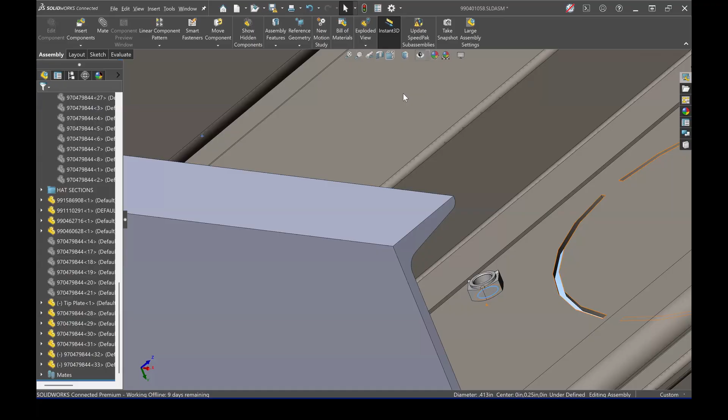All right, mouse gestures are not as easy as the S key. You have to go into the menu, go to mouse gestures. But this is a lot easier. The way you used to have to do mouse gestures back in the day was more complicated with the menu and how you had to apply them. When they came out with having your mouse wheel right there and dragging and dropping was just beautiful. So that's all you're doing - searching for the command you want, and you drag and drop it into the appropriate environment.

I do want to ask one quick question for you guys on Zoom and in the room: do you find one command that is on every one of those mouse gestures that's the same? Mine, I have the S key. That's right - bottom left quadrant of the mouse gesture, there is the S key, the shortcut menu.

So now not only do I not have to reach to the keyboard when I'm taking a bite of my Big Mac and trying to draw at the same time, I can just use my mouse gestures to initiate the shortcut. Now I'm just extra lazy, right?

So no, and I like using the word lazy. It's not a bad term when it comes to engineering, in my opinion, because I was always told by a professor - and I think I actually have a quote from somebody, I think it was Bill Gates, said something about I will always hire the laziest person because they will find the fastest way to do something. They will save you the most money. Now you got to make sure you're doing that in conjunction with not reducing quality and that kind of stuff when we go back to looking at the design for X or whatever you want to call it, right?

So there it is - question in the chat: I prefer 8 mouse gestures, what does everybody else prefer? Good question. Anybody in here use mouse gestures? How many do you use? 8. All right, in the chat, yeah. How many of you guys using in there? I use the full-blown 12. When they went to 12, I went to 12. When they go to 100, I might go to 100. I don't know, it does get a little cumbersome - that's why when I light my mouse gestures up, sometimes I got to look again a little bit. But it's all good, I love my mouse gestures, and I wouldn't trade them for anything.

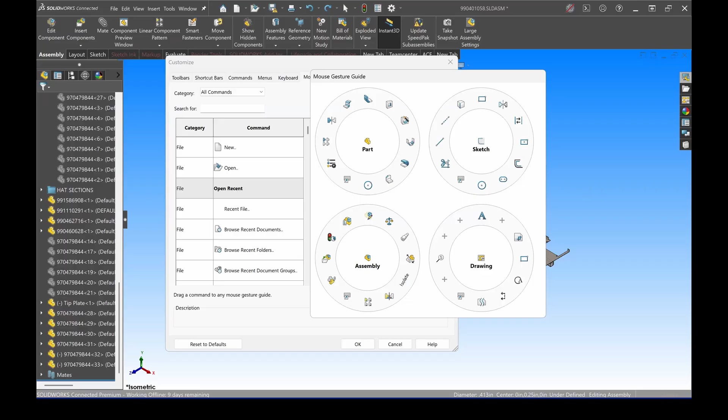We're at 135, 130. Okay, I'm gonna tab this up real quick. Isolate changed dimensions, I've got to show this one.

This is something I found I did not know SolidWorks did. It came out in 2012. Does anybody ever use this? In the chat, I'm curious, has anybody ever used isolate changed dimensions before? Never seen it. Never. I've never seen it. So that's why I had to include it in this.

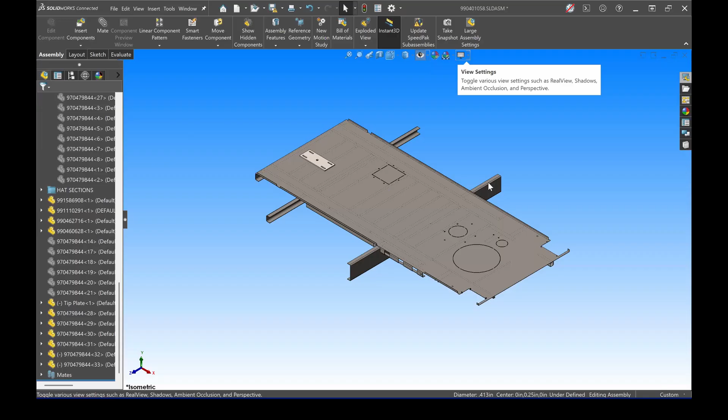If we go back to SolidWorks, we're going to close these menus here. And I've got a part that I can open. Let me close it and make sure it's not in my stuff so it doesn't mess with what I'm trying to do here. I delete and then come up, open, PowerPoint, next level tips and tricks, tip plate. Okay.

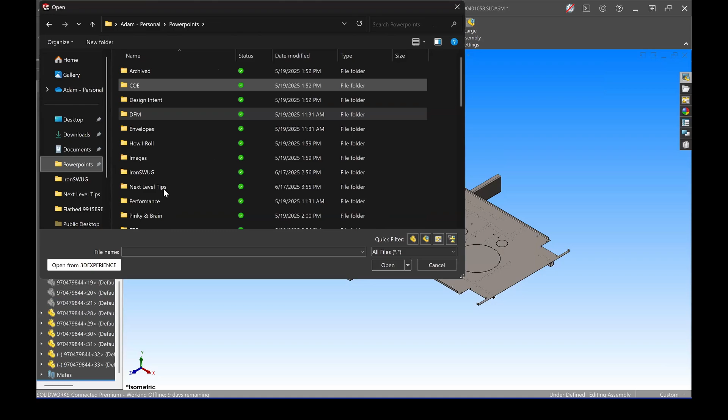Anybody ever opened up a drawing? Maybe somebody was doing a model for you and now you're doing the prints, or maybe you're just a print guy and you're doing prints, right? And you're kind of wondering what's changed on this model, what's different, right?

So all you have to do when you open that print, if something has changed and you don't know what it is, go to View, Hide and Show. And if you see it before me, it says Isolate Changed Dimensions. We come back here and click. The only dimension that changed was that hole diameter. It went to 1 inch. And furthermore, if I go and highlight over it, it tells me what it was.

Now that's a knowledge bomb that I'm dropping today, because I got it dropped on me when I was investigating this presentation. So that is pretty cool. It works with all these dimensions that are on here. If those dimensions are on there and something's changed, you can easily go see what's changed. Maybe you did it, maybe somebody was helping you with an EC, and you need to figure out what to put in your EC revision block.

The question in the chat, does it show just one revision or multiple? I think it's only one change. One change. Feedback says just one. So whatever was changed in the last save, the last rev level. Let's say. Yep.

Yeah, so if the part was open, somebody went in and modified that part, hit save and closed it - or for example you on your part, right? And then you go and open the print afterwards, you can do that View, Hide, Show, Isolate Changed Dimensions, and it shows you what the change dimensions were.

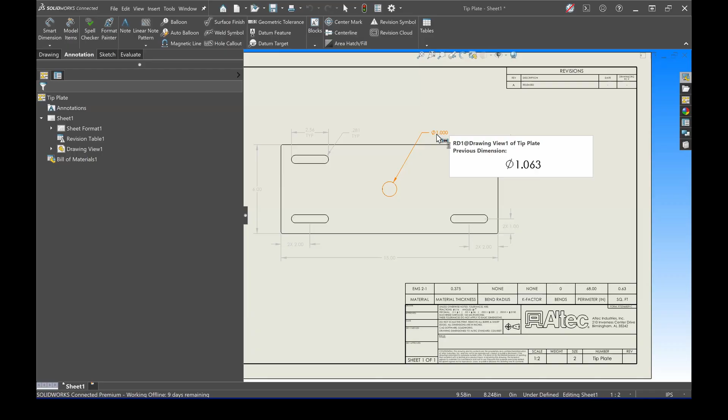Yeah, all right, so let me jump back. I think the rest of them I will just kind of breeze through to get to the end. Breadcrumbs, that's a great tool. If you don't know it, look it up. It came out in, I think, 18.

Select over geometry, that's a cool tool. That's in your selection menu. You go to your selection menu, select over geometry. If you're zoomed into a part, it'll work. Works in a part as well, but I think I see more advantage in assembly. Like if you're trying to select a whole mess of parts in a certain area, the right to left selection and left to right selection still work the same. So whatever's on it or crossing over the lines versus whatever's inside of the box when you select left to right or right to left stuff, it's functional there.

But if you go and you're zoomed into a big model and you want to select those parts that are in that area and you try to highlight over them with a selection box, it doesn't work, right? But if you go to your selection drop down and do select over geometry, then you can make that functionality work.

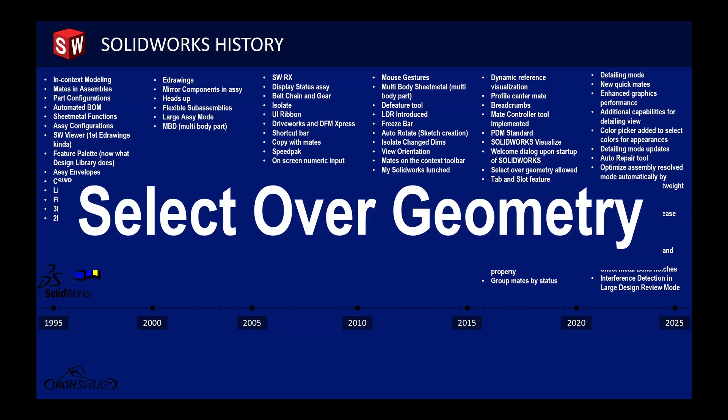That was 2018. Mates - I've spoken about this many times. Group mates is a great way, if you've got a lot of ketchup and mustard in your stuff, go to your mate folder, right click, group mates by status, and it'll put them in folders based on solved, overdefined, and unable to define. So your ketchup and mustard will all be separated into folders.

Then you can go to your red ones and try to solve those first, because if we solve the red ones typically you can sort those issues together so you can manipulate them better. When you're done, go back to your mate folder, right click, group mates by status, and it'll flip it back the way it was in case you don't want to keep it that way. It also auto-sorts, so as you solve them, fix them, or mess them up, they'll jump between folders for you, and you'll see them solved in the folders too.

That's a really cool feature. So back to what I was saying earlier, we both like to give a call to action, as well as do notes. If I was you and you were me, sitting in your shoes, what would I have written down for this meeting? What stood out to me when I was doing this stuff?

The first one would be: come to SWUG. You're going to learn things here that come out in iterations or what's new. You're going to learn new things. It's the people's CAD - we learned about it. It came out for the people, it's still being developed for the people. This user group - I've been in a lot of different CAD softwares, and I don't know of another CAD software that has a user group base like this one does. Onshape tried it, but I don't think they were able to get it like this one was. So it's the people's CAD.